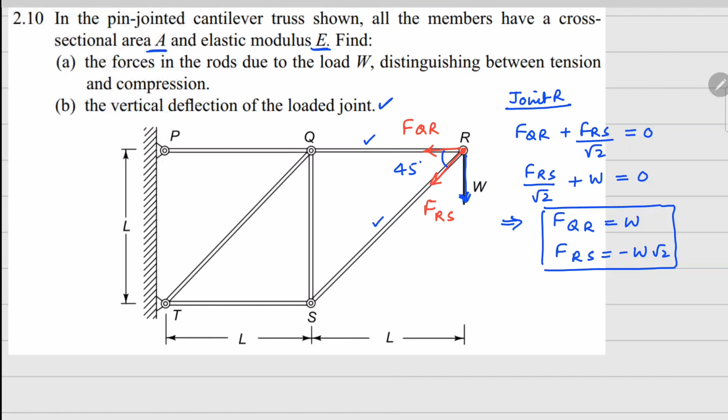This is in X, and in Y we can write FRS over square root 2 plus W equals 0. So from this we can calculate FQR equals W and FRS equals minus W square root 2. Now we have solved for this one and this one. So the next joint we can move to is this right here, because this will again have only two unknowns, this one and this one. So let's call this FQS and FST.

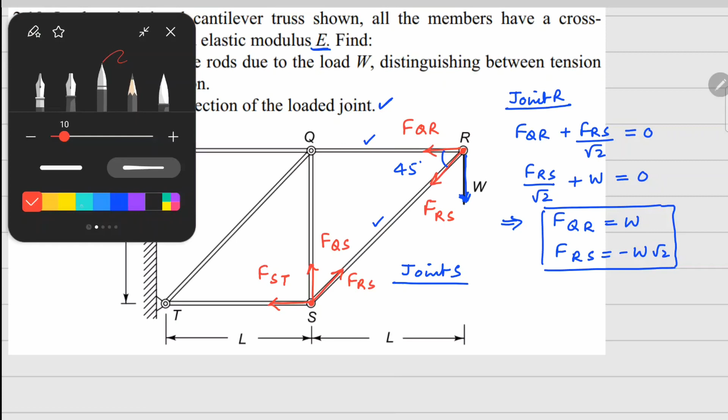So we can write down the equations for joint S, and I have missed one force, which is going to be this way, which is your FRS. So if I write the equations in the X direction, we have FRS over square root 2 because of the angle 45 degrees there, minus FST equals 0. This is the X force balance. Similarly in the Y direction, we can write FQS plus FRS divided by square root 2 equals 0. So from this we get the next two forces, FST equals minus W and FQS equals W.

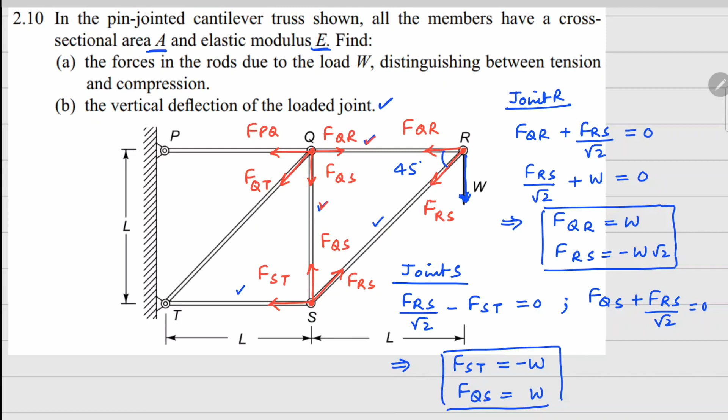So now this is also known, this is also known. Now we can go to joint Q. Now this is known, this is known, so we have only two unknowns again. So this one is FPQ, this is FQT, this one is FQS, and this one is FQR. So for joint Q we can write equations: FQR minus FPQ minus FQT divided by square root 2 equals 0, because this angle is also 45. In the Y direction we will have FQT divided by square root 2 plus FQS equals 0.

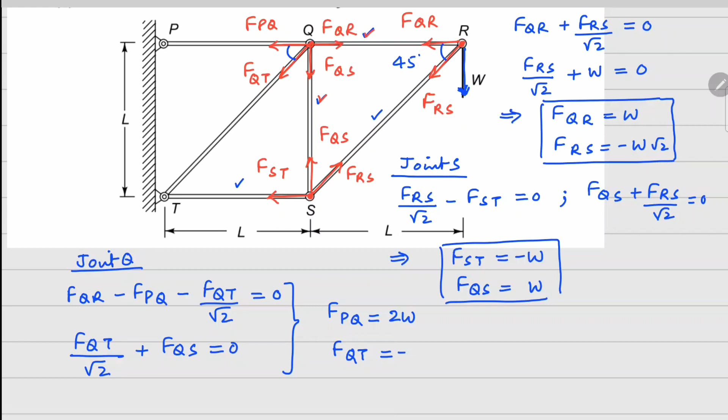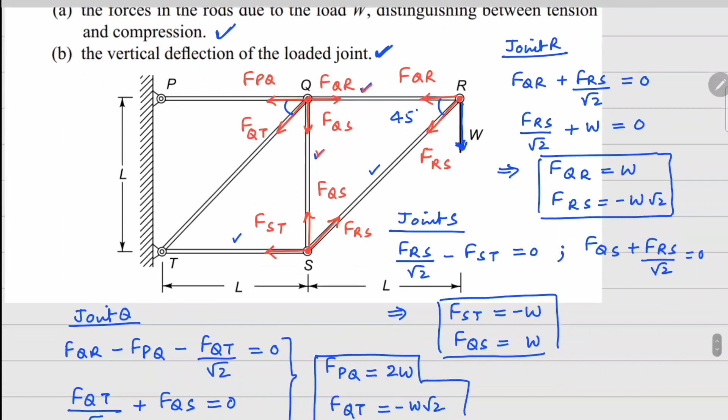So if I solve these two, I get FPQ equals 2W and FQT equals minus W square root 2. So now we have picked up all the member forces. So part A is over. Now the next part, we need to find out the vertical deflection. For vertical deflection, we can use Castigliano's theorem, which says the deflection in the direction of the applied force is the derivative of the potential energy with respect to the applied force, W in this case.

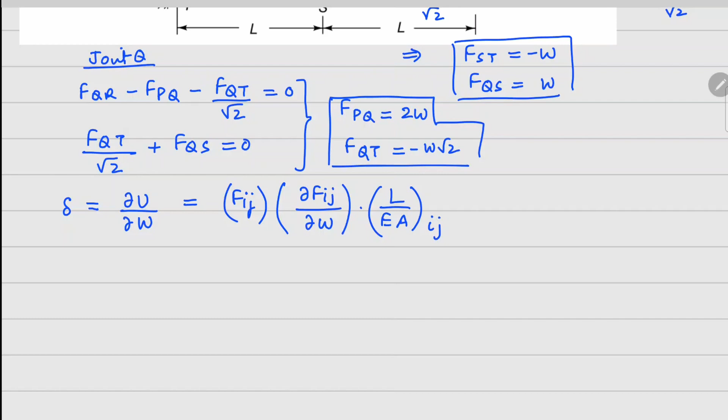This can be written as the member force times the derivative of the member force with respect to the applied force times the stiffness term, which is L over EA for member ij. So for each member we multiply these three entities, and that cumulative sum gives us the total deformation. For this purpose it's a good idea to make a simple table and list all the members: PQ, QR, QS, QT, RS, and ST.

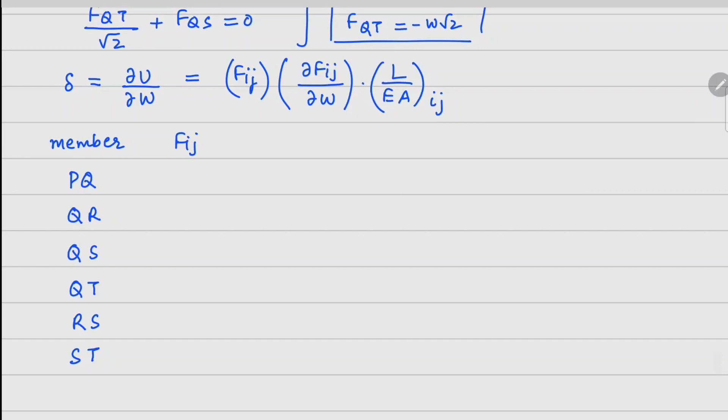Now in these members we have calculated the forces. The member force in PQ is 2W, and QR is W. Similarly, QS is W, and QT is minus W square root 2. Similarly, RS and ST are minus W square root 2 and minus W. The second part is the derivative of Fij with respect to W. The derivative of this with respect to W is 2. This is 1. This is 1. Minus square root 2, minus square root 2, and minus 1.

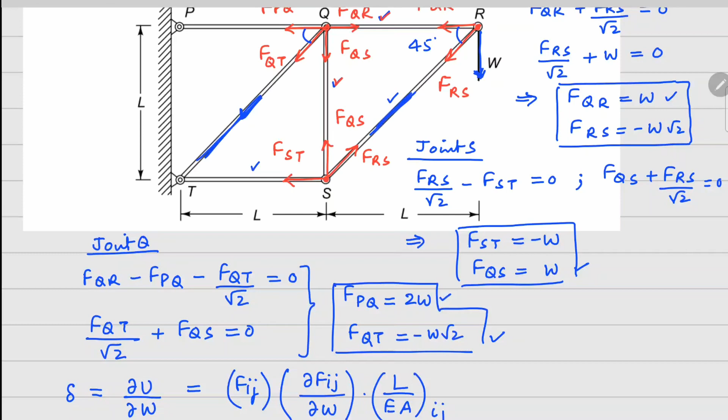Now the third one is L over EA for member ij. E and A are the same for all members, only length is different. If you notice, only two members, QT and this one here, will have square root 2 L. Everything else has L. So we can take L over EA common and write it as a multiplier. So this becomes 1, 1, 1, these two are square root 2, and 1. Now we multiply these three terms. What we have in common for all terms is WL over EA.

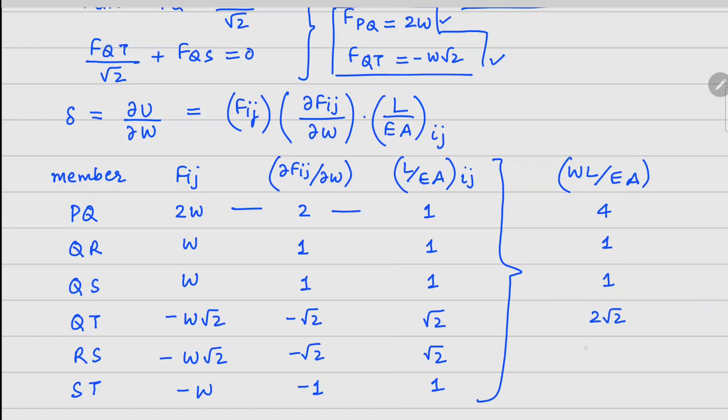When we multiply the first term, we get 4. The second term gives us 1. The third term gives us 1. This one gives us 2 square root 2. This one also 2 square root 2. And the last one is also 1. So when you combine all this together, delta V is 4 plus 1 is 5, plus 1 is 6, plus 1 is 7. So 7 plus 4 square root 2, multiplied by WL over EA.